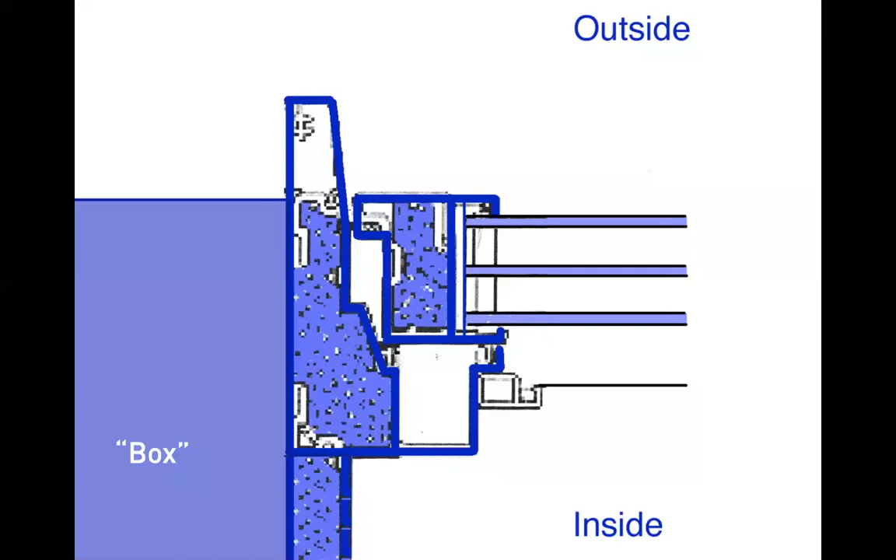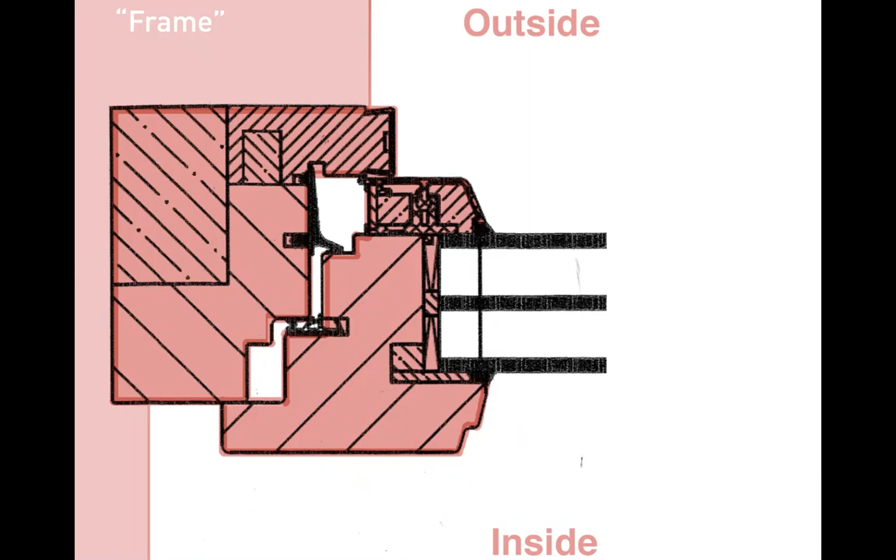We typically install what I call box windows. It's a window that you push in from the outside into an opening and finish it on the inside. Compare that with a European window - that's a frame window, meaning you have to finish the outside and the inside to it. So you set it somewhere in the middle of the wall in an appropriate location, and I'll get to that while I'm explaining it. But basically, you have these two kind of variations of windows in principle.

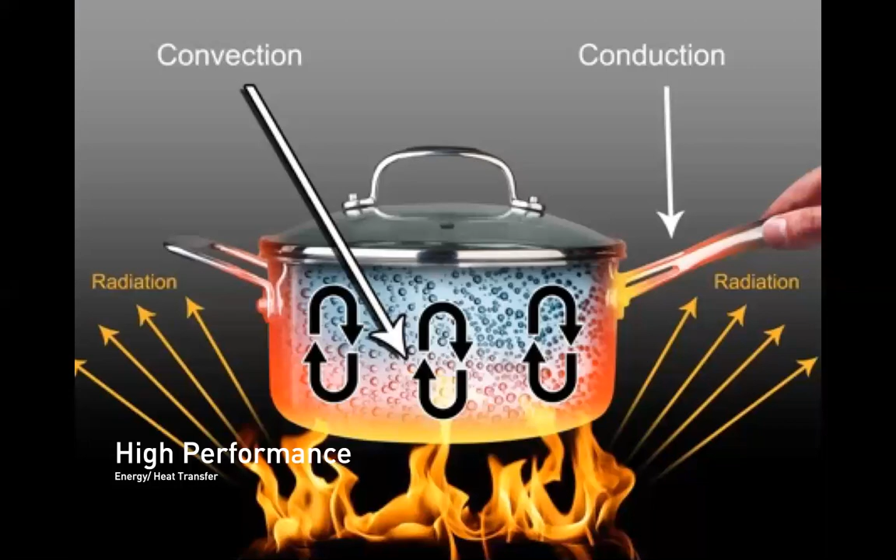The next thing is, we all know if we do high performance and talk about energy, it's all about heat transfer - convection, conduction, and radiation. If you build a whole passive house or you're looking at the window, fundamentally these principles apply. So a window or a window opening or door opening for that matter is basically a small passive house. So you have radiation, conduction, and convection - thermal radiation and solar radiation, and that's what we're trying to make use of.

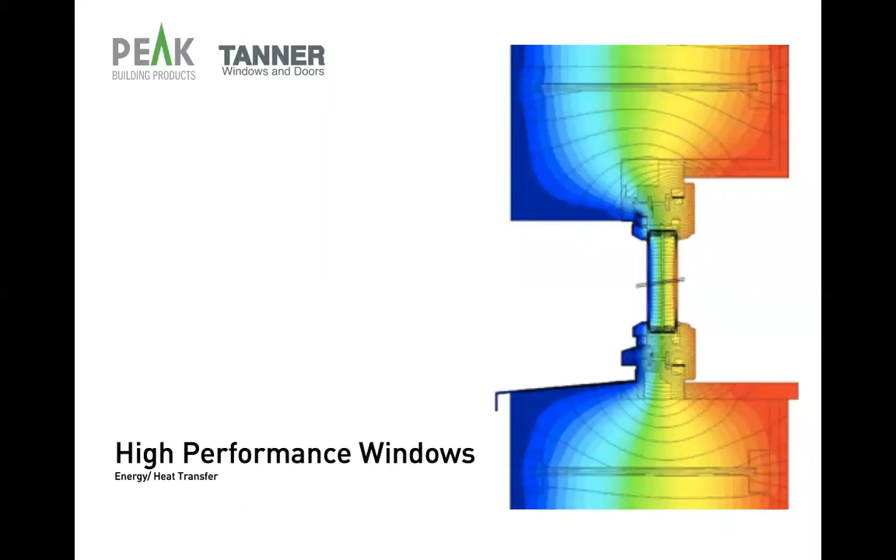If you kind of put this in a wall, this is how to make this transparent - we know all this graph. So this is now a true high performance window. We have the frame, and that's where the frame window really has its advantage - you can actually over insulate the frame. You make the frame part of your wall assembly, so there's an integration happening. You have the frame itself, and that is a component to be talked about, and then of course you have the glass.

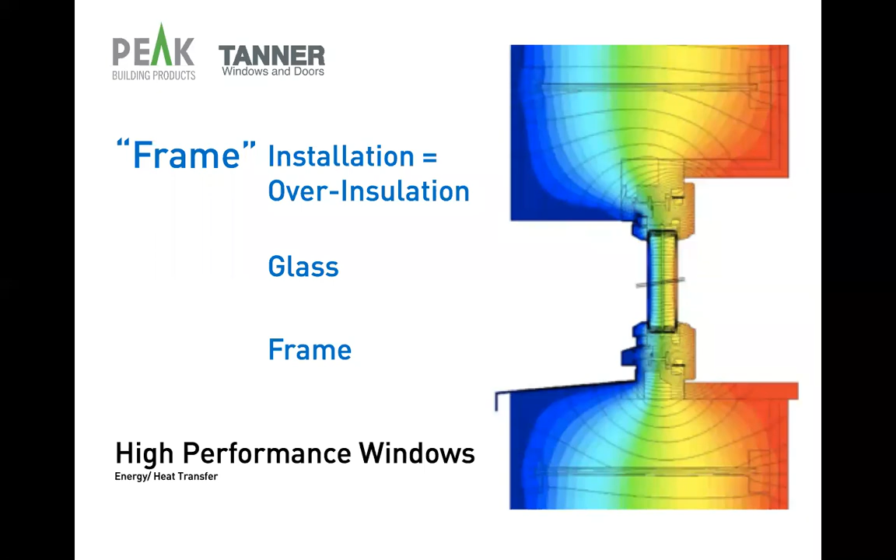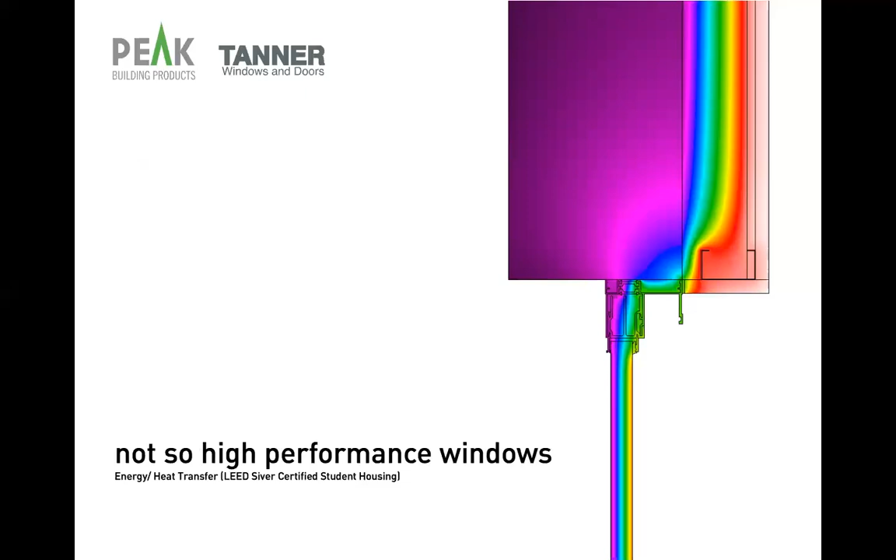Now you compare that to a not so high performance window, and this is actually in a college dormitory that received LEED Silver rating. You see that you have issues here of potential condensation, potential component failures. You even have the risk of mold and health-related issues.

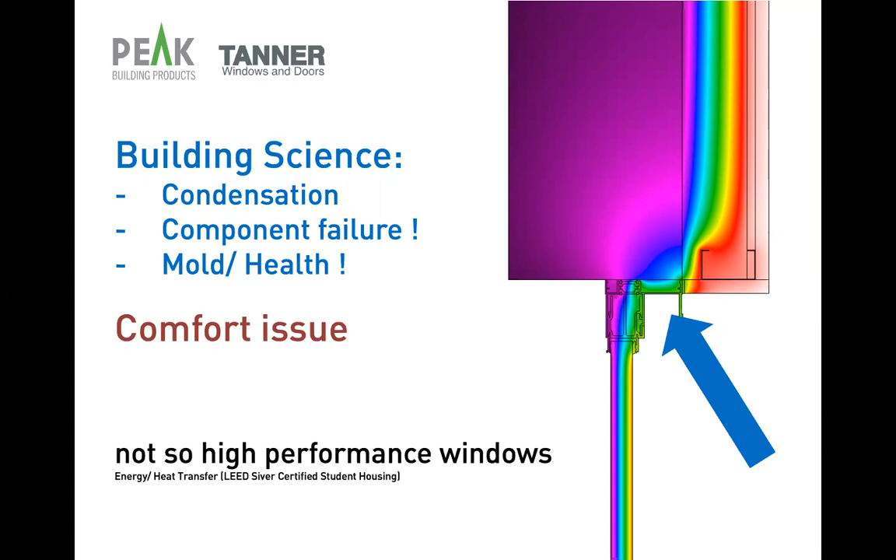So starting to insulate and make super and high-performance windows in buildings, the issue truly is it's not as trivial as many people make it sound, and the devil is in the detail. And probably the point to be made, next to the issues in blue, you also have potential comfort issues.

So getting back a little bit into the history of passive house and passive house windows - Feist, when he figured the passive house, or defined the passive house, started to define clear components to reach his target of 15 kilowatt hours per square meter heating energy. And of course, the most critical component, next to the ventilation system, is the window. So he defined in the late 90s the window components, and that 0.8 overall window target he set for certification of windows was really based on available glass technology at the time, and not available frame technology.

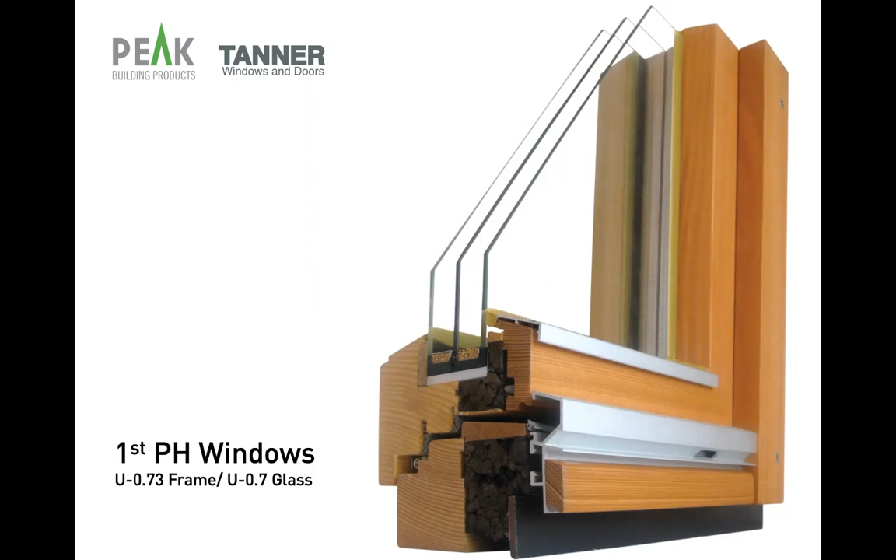If you compare that now with today's typical passive house window and go straight to that line below, you see our typical glass is 0.5. So there's truly less pressure on the frame than it was 20 years ago. This means the technology could be developed more around the glass, because the glass outperforms the frame in many or most cases.

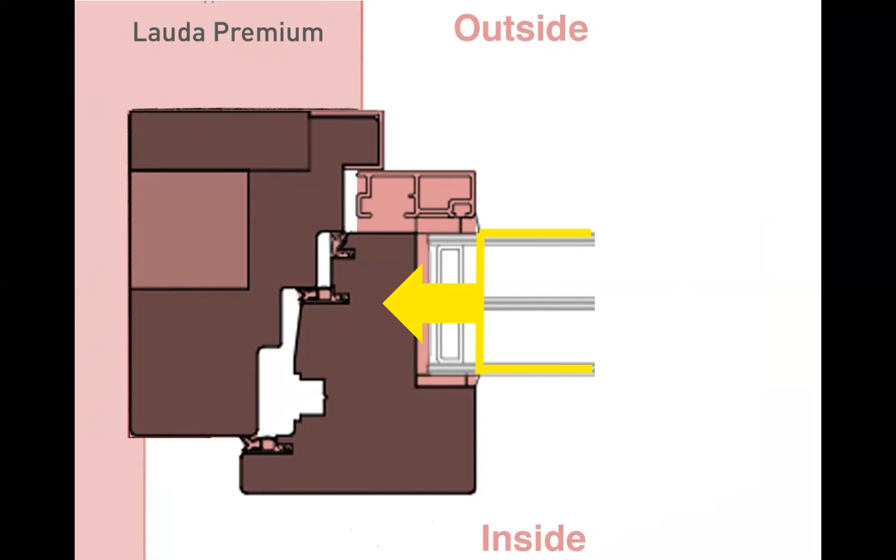That is a cost opportunity, but at the same time it's also a window development opportunity. You kind of see how we've taken it from our point of view at Tanner Windows. You could say, is there a way to value engineer this frame away so I basically only have glass exposed to the exterior? That's the third generation of passive house windows, our Vitra Premium, which you see installed in the wall.

Basically, a fixed window and an operable window. It has no frame exposed to the exterior. So from an overall performance aspect, this is probably a superior window.

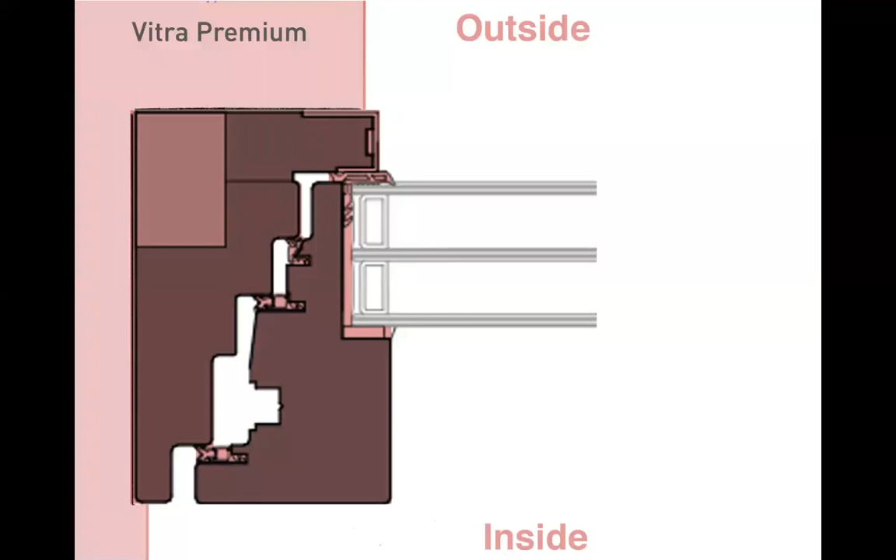Many people probably know it costs more than the typical frame window I showed you before. It just gives you a sense. And if you keep driving this to the extreme, this is our newest one, the frameless fixed window. You can basically just make glass openings with just the operable being framed. And that would look like this.

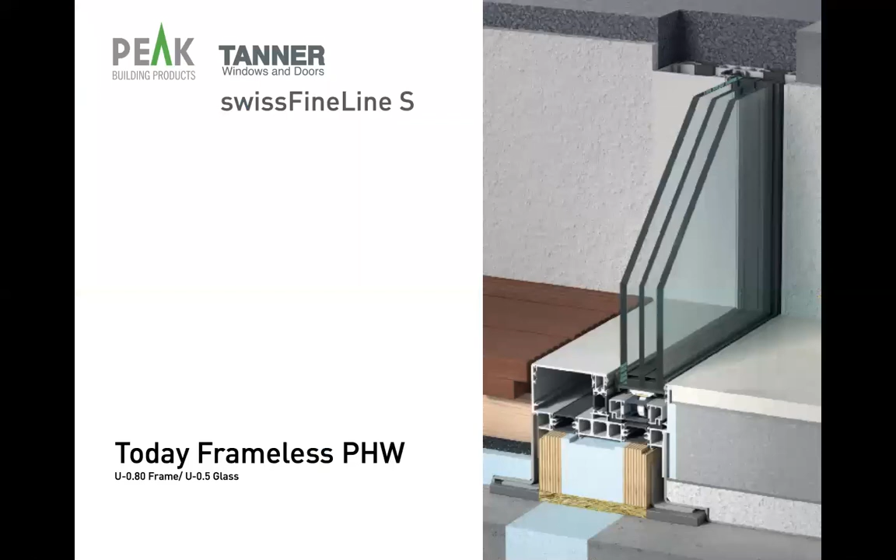Of course, in the metal frame world, you have these frameless windows, which we represent with Fine Line, which lets you do very, very large, almost just glass-looking buildings. What this really means is that the whole frame technology starts to move into the wall and becomes an integrated part of it. So the whole detailing is now more involved than just pushing a window in like the typical American boxed window.

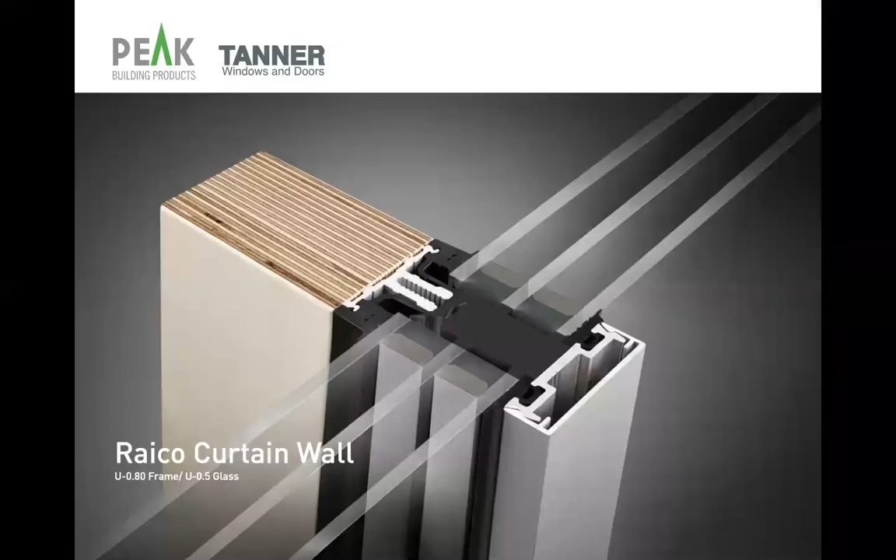You can do the same thing in curtain wall. Here we represent the Raico system. You see how this performs, as the heat transfer here shows. It also shows that you can do very cool stuff. We're one of the few who had the opportunity to build a glass box.

Now, the simpler it looks, the more complex it gets. I will stress this at the end again, but fundamentally, it really requires an integrated approach.

To make this happen, you can imagine that this is actually a bridge. The deflection of the structure of that glass box, with minimal shear in the exterior wall or none, glass corners with no support for the cantilevered roof, has deflection that is above and beyond any curtain wall or glazing component.

As such, finding a slip structure in this area so that the roof can move differently than the supporting glass structure is not a trivial undertaking, and takes time, and therefore also accrues cost. So this is not an inexpensive building, even though it looks very, very simple.

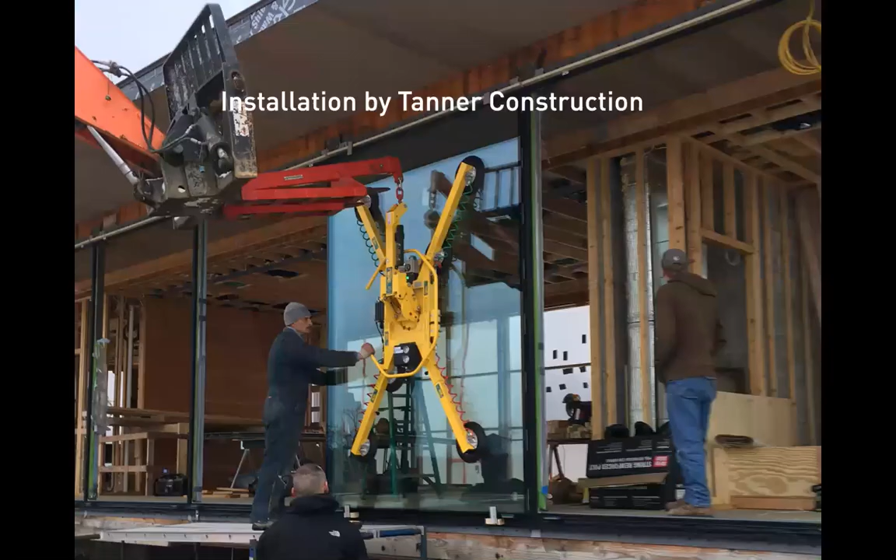We have the opportunity, as a company I work for, it's a family operation. My son Robert does sales. I support efforts on the technical side, and my second son, Seth, runs a construction company. So we actually do the full vertical integration and have the equipment to do all the large and complex installations.

To get back to the technology you're probably interested in, I tried to dig a little deeper here. Fundamentally, windows come in these typical frame components: man-made fiberglass PVC frames, the whole wood-clad system, and the metal technology used for frame. We only sell the wood and the metal, because the man-made typically has limitations in size before they need to put structural elements in, and then those structural elements become metal and struggle with performance.

So this is definitely a very viable option for a small to mid-size punch window. But as soon as you get to more complex configurations, the technology has its limitations. So we kind of stay on the wood and metal side. If you have any questions, I have less experience with the man-made material than I have with the others.

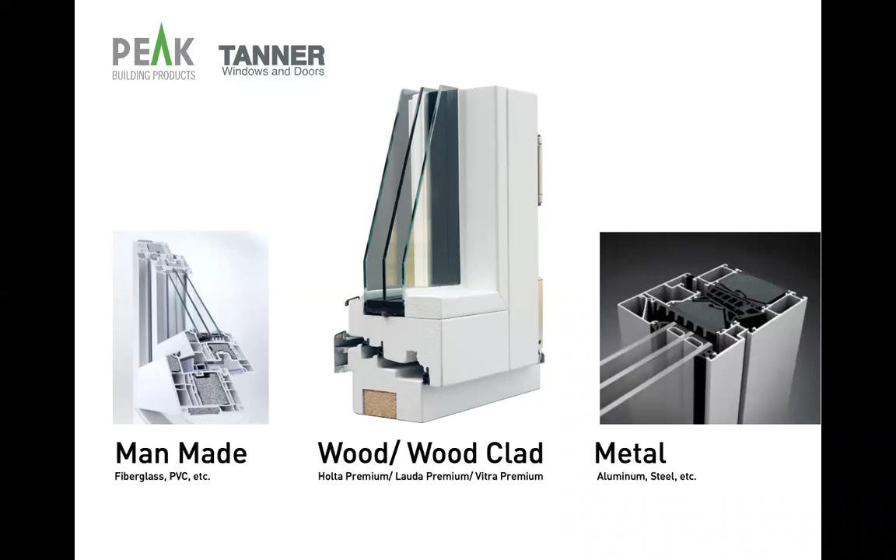A small point to be made: if you build a passive house versus a standard frame, you can use these days both, because with the high glass performance you get still quite good overall window performance.

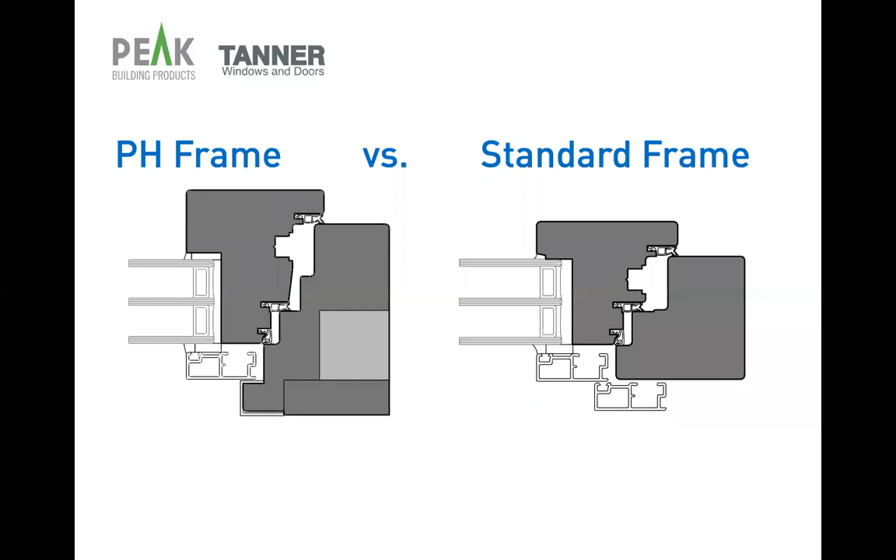The over insulation becomes interesting, and we know all about thermal bridging. If you look at the cladding, a true passive house frame has as minimal cladding in the over insulation part as absolutely necessary. We reduce that in the standard frame, but typical frames are all fully clad, and if they incorporate into the wall, you basically have a thermal bridge which defeats the purpose of the frame window's advantage in the first place. So that's something to consider when you look at different providers of high performance products.

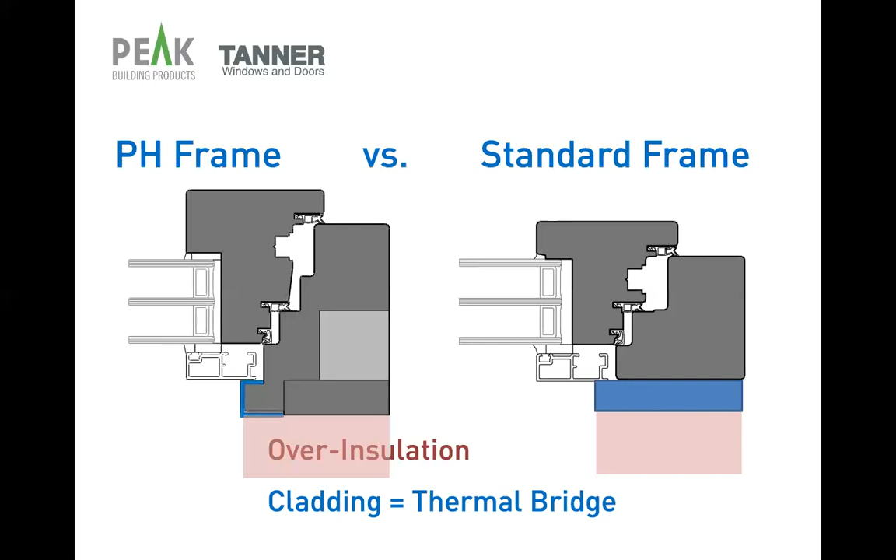If I dig deeper into it, a tilt and turn window here, a cross section of it, you start to see the hardware is usually in a particular location. Most Europeans use tilt and turn, so they're all toward the inside opening. Because you have over insulation, making them open to the exterior is counterproductive.

The second thing, if you have a window, you need superior seals. Typically there are 2 to 3 or even 4 opportunities to add seals to a window frame configuration, and that has to do with how the frame is actually configured in profile.

I think the most critical piece to understand with European windows, or these tilt and turn windows, is that they all have a water drainage layer. They are not built to be absolutely watertight. On high wind and rain loads, they receive water, and that water drains out toward the sill. I'll get to the installation and sill detail in a minute.

The critical piece is really the capacity of that drainage. If you have very strong winds and a lot of rain, the issue is overload, which can mean the wind pressure pushes water into the system. So we've added a second drainage layer, one of the few in the market, to accommodate that minimal event. It's definitely something to consider depending on your geographic location - in the desert Southwest less so than in the northeast of the States with a lot of rain.

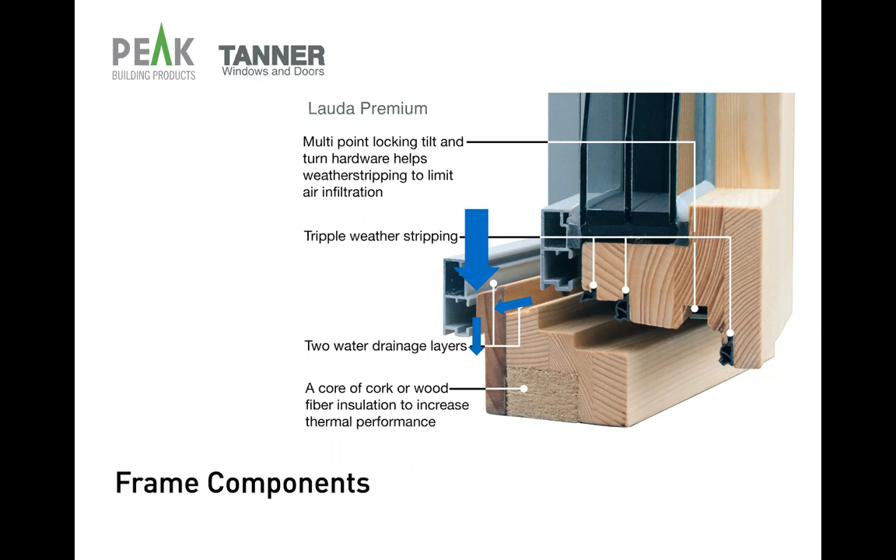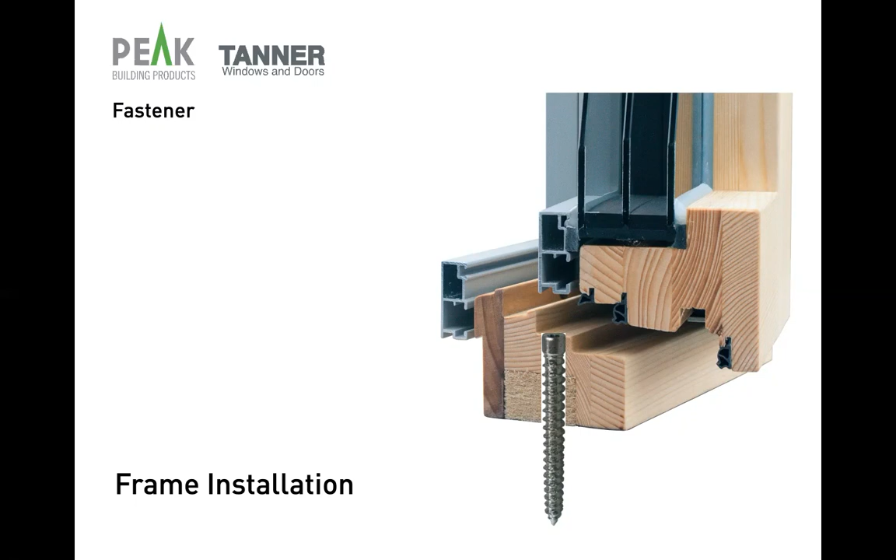Now to the installation. Typically, frame windows are installed with bolts - I mean, they are massive frames. The advantage is you have less of this S-curve kind of issue compared to the traditional thin structured box windows, which are like 4x4s you install into a structure. So you can use these bolts to truly level and plumb the window into the wall.

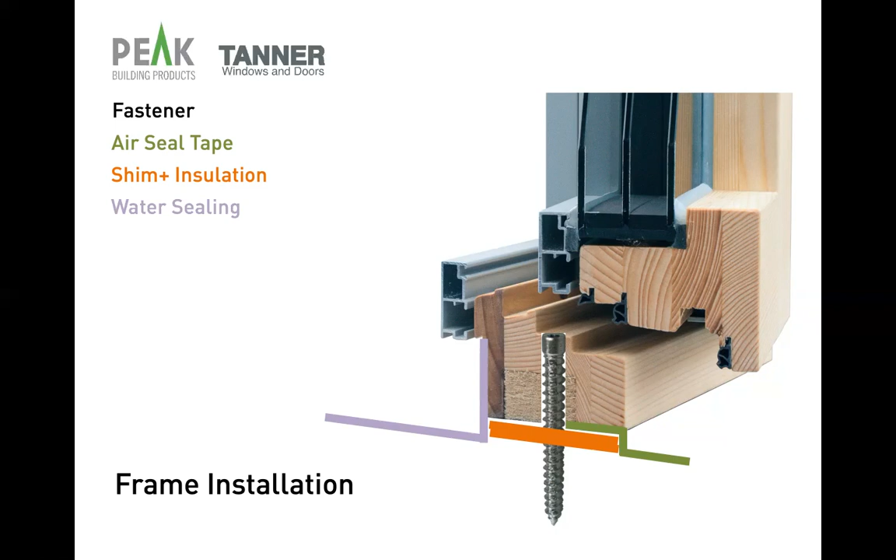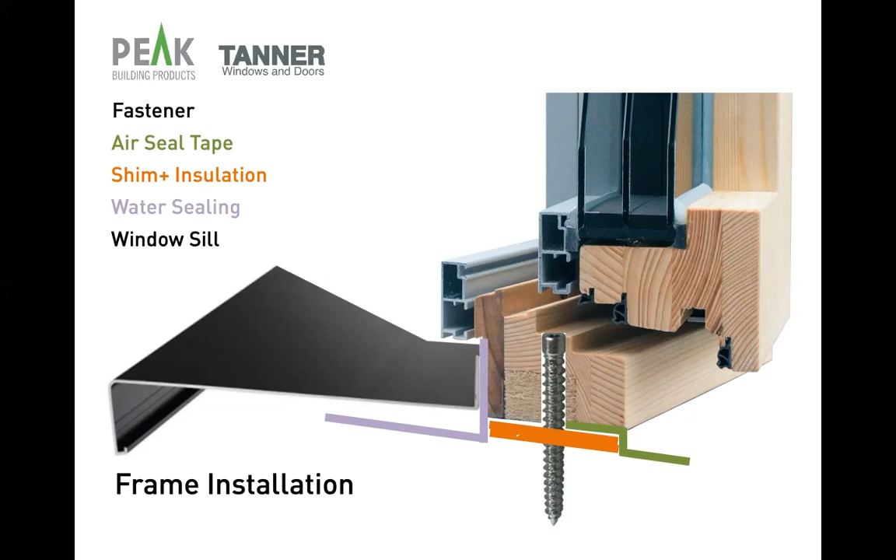It usually has a seal on the inside for air tightness - many of you know that. It gets foamed in and insulated in the gap. It usually attaches a water seal to the exterior of the frame, wherever that location is defined in your building, and then adds a sill to it. I think the most critical piece is understanding that water drainage area I pointed out before, which allows drainage off appropriately through a sill, can be any configuration. We typically provide, at least in our proposals, a placeholder for the typical European aluminum sill. But this is basically the basic installation component of a window.

Now let me transfer the point from frames, and we can talk more about frames - ask me questions. I know I didn't talk about doors and door opportunities and hardware opportunities, so one can go left or right here on the frame side. But now I'd like to briefly touch on the glass.

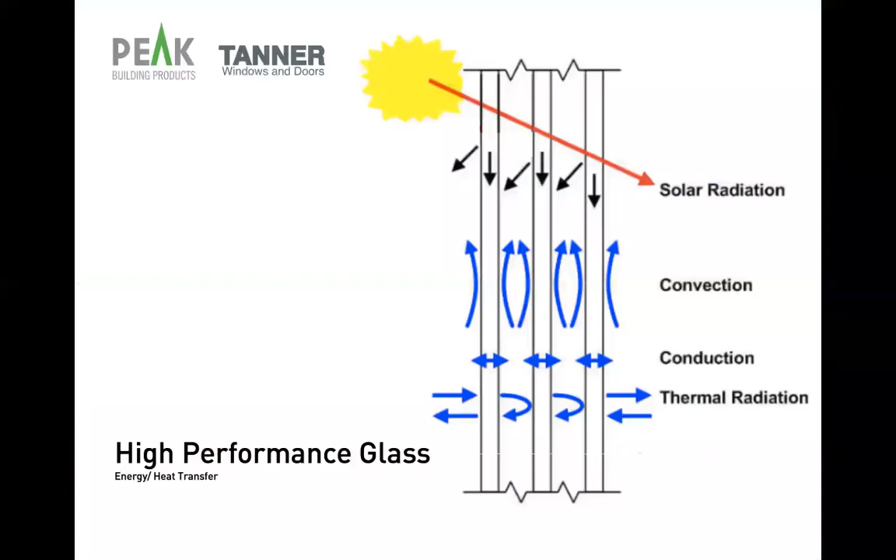So glass is really what makes it a passive house - that's the critical thing, as I pointed out. Glass technology is where things have happened. It still operates under the principle I pointed out: the glass is really the piece where the solar radiation is added to the three pieces below.

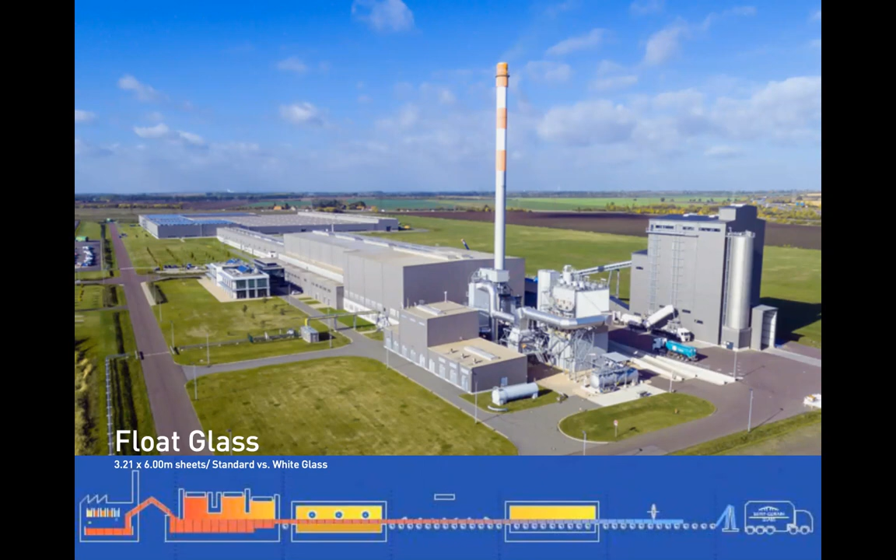The first major point I like to make is this is all major investment. Whatever we like to have done, you have to find a very particular newest machine to maybe get something you don't get anyplace else. Otherwise, the market really defines what you're going to get.

It's the first piece. And the second piece, to go slightly into left field, is it takes an awful lot of energy to make this glass, so you have a pretty large amount of embodied energy.

To give you a sense of this, as Andreas pointed out, I have many hats. One of the hats is I'm associated with a company called Intep, which stands for Integrated Planning. It was started after the first energy crisis in the late 70s, and we just celebrated our 40th anniversary.

Primarily focused on consulting, and the consulting expertise we have, which is quite unique in the world, is our forte of deep understanding of the material flow through the life cycle of buildings. So energy for us is energy flow, but we have material flow, we have labor impact, and so on.

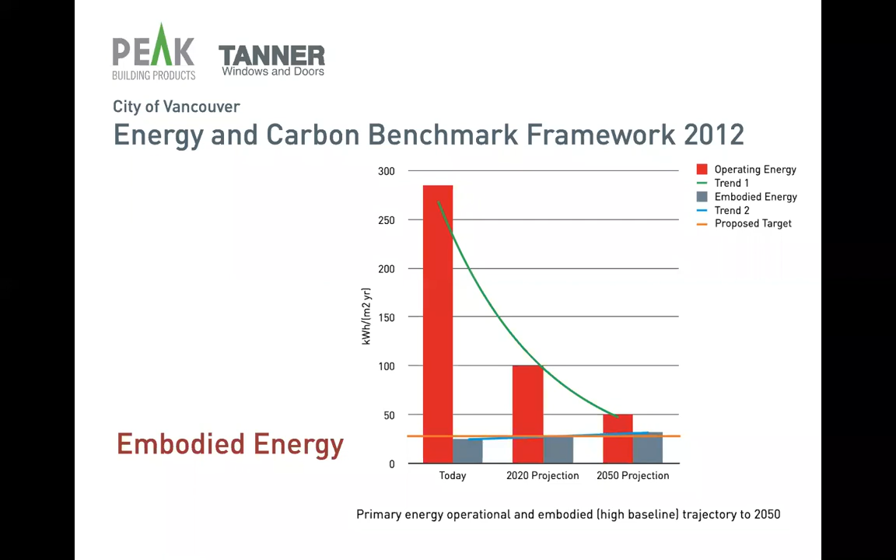Long story short, sorry for diverting off - we can have this conversation too, and I probably could have a workshop on that, but I thought it's important because we're talking about glass, and glass is a big embodied energy piece. Going now to the two critical values we look at in the glass.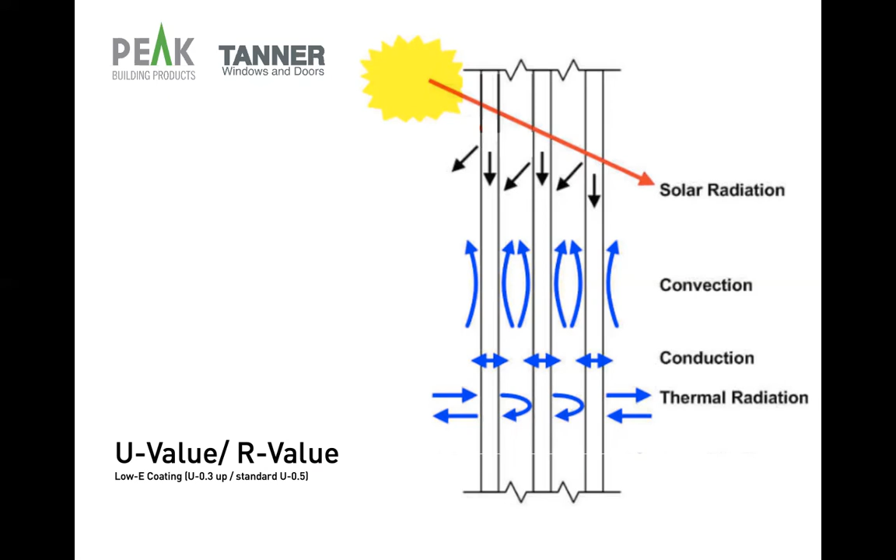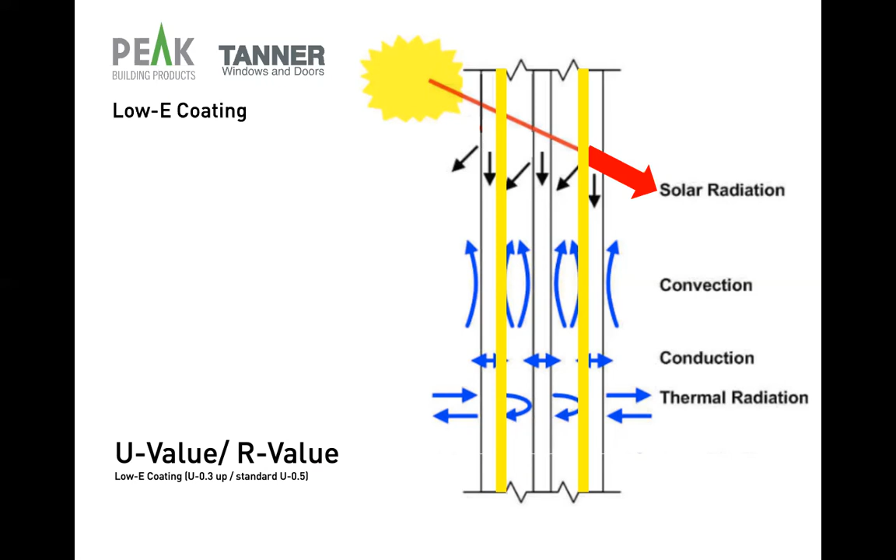The convection, conduction, and thermal radiation - these are basically coatings. You get them on the inner side of the inner pane and the inner side of the outer pane. They're commonly known as low-E coatings. They're typically silver-based, and that's what drives the price. The second piece, as probably all of you know, is the filling. The components for high performance are the noble gases: argon, krypton, and xenon.

And as the order goes, argon is the least expensive, krypton about 10 times, xenon about 100 to 500 times more expensive, or in that magnitude. So trying to go to the heavier gases is a good thing, it's just a cost driver. You also see the heavier the gas, the thinner the air gap can be. This is why you see North American suppliers quickly go to the thinner pane, double pane with the heavier gases, to try to compete in the U-value competition. But at the end of the day, the least expensive way to get really high performance glass is with argon.

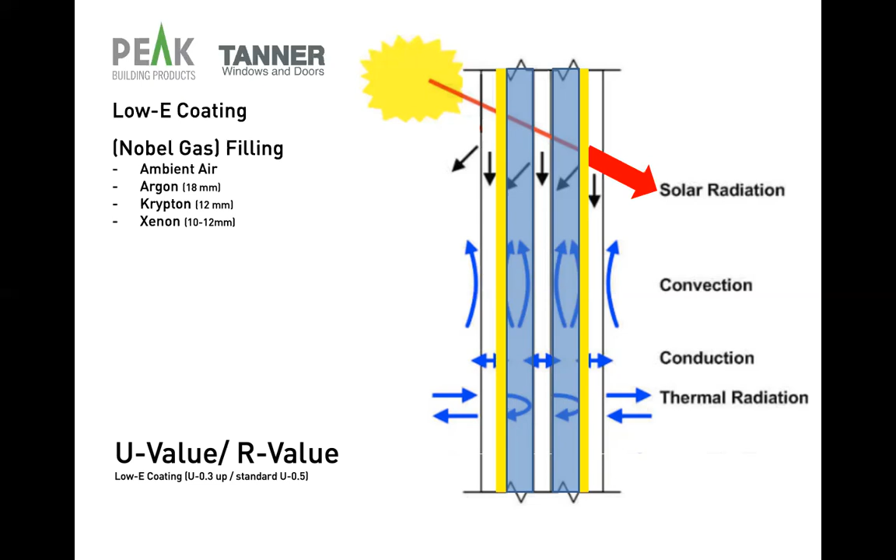And Feist already defined that also in his original targets and requirements. You typically can get from a supplier a glass spec sheet. You find typically the coatings listed someplace, listed here. Each manufacturer has their own name for it, so it's a name game.

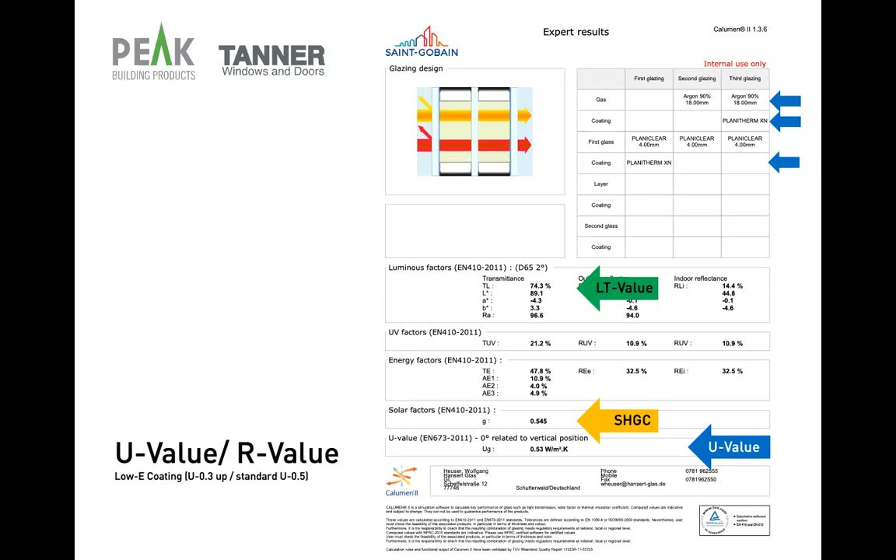And then you see up here the gas filling, argon, or all these gases are typically 90% or a mixture of. You can get argon krypton, you can krypton, and so on. There are tools out there, you can play with this. Some of these glass manufacturers can give you access to it, but it results in a U-value, and the solar heat gain and light transmitting values, which I'm going to get to next.

Before I get there, of course, many of you might have heard of vacuum glass. It's most common these days in China primarily. It has a certain cost, technology interest. It's been on the market for over 20 years. I've seen the first vacuum glass in the late 90s, early 2000s.

They're basically two panes of glass with these little dots, there are spacers in between. You see the space in between is part of a millimeter. And then the vacuum is really the place where the insulation value comes from. The issue with these is the size is, by most manufacturers, limited to how they can manufacture - a meter 50, so 5 feet by 8 feet is about where they cap out. I don't know of many who'd make them bigger. And the biggest issue is, of course, the edge, because that's where you seal the vacuum in. So there are some issues with this particular technology, and we can talk about that.

Which leads me to the edge condition. So the spacer is, I think, one of the most critical, undervalued components. They're very, very hard to get here in the US. I don't know of any insulated glass unit manufacturer that stocks super insulating spacers like a Swisspacer Ultimate. They're standard in any European manufacturing plant. So for us, we struggle with that tremendously. We produce everything in the US and in Europe, due to some of these component limitations, and that's really driven not by technological limitation - it's basically a market demand limitation.

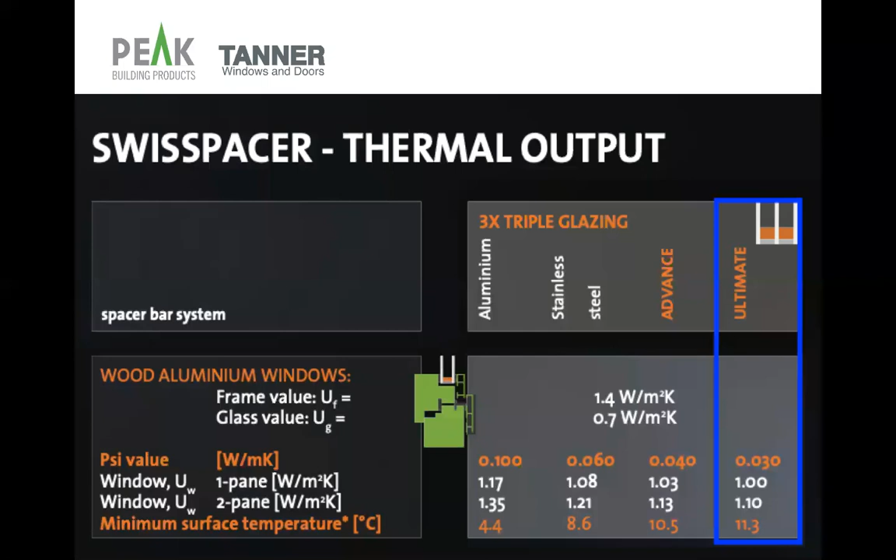There are many things one can go down. Glass can do many things. On the coating side, I can coat for UV, I can coat anti-glare, so you can make glass that you don't see if it's very clean, and people can run into it. That's probably the downside - that's what birds also do, so anti-bird strike is a coating. You can go to smart glass, so you can put current to it that changes the tint or the solar heat gain coefficient on it, and so on. So fundamentally, there are other coatings. You can treat glass - heat treatment is probably the most well known, for security reasons. And on the security side, you get to lamination for the same reason, security. But you can do it for sound, bullet, hurricane - you go down the list. There is a whole list here, and that can be endless in itself.

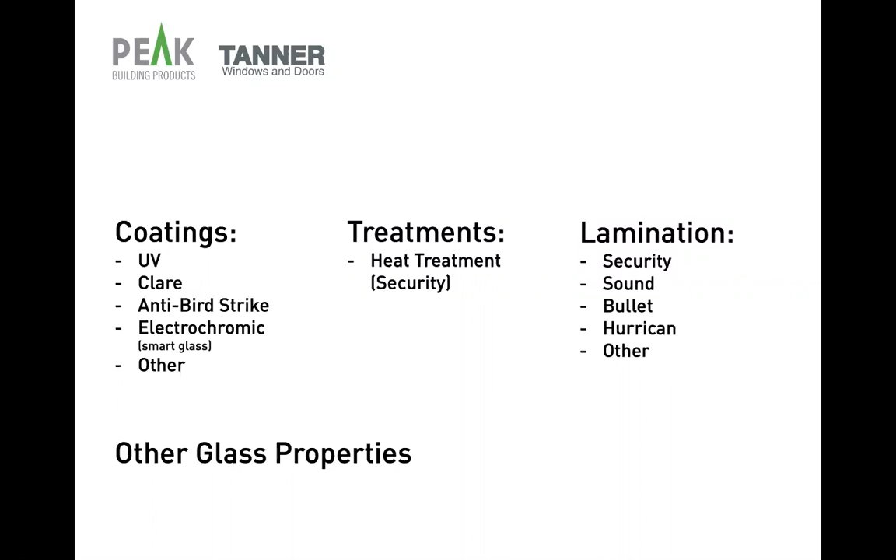So I move now to the second piece here, and I think that's what makes the passive house a passive house - really making use of the free solar radiation. And so if you are in a climate that is cooling load driven, the typical and traditional response to that is that you coat for it, and you do that on the inner side of the outer pane. And you can reduce that into 30%, 25, 20% solar heat gain coefficient. The lower that goes, the more expensive these coatings typically are.

A personal note to this here, and I added the light transmission value to it. Of course, the lower the solar heat gain, the more it becomes like sunglasses. The more tint you have in the glass, like sunglasses, the less light comes in, and that's the light transmission value. So the light transmission value also gives you a sense of clarity of glass. And if you look to the capacity of coating equipment or their age, this is really the interesting place to look at it - see how low the solar heat gain coefficient is in respect to how high the light transmission value is. That means the clearer one can make sunglasses, the better and newer the equipment is, because that's really where the newest coating technologies have made advances in the last decade.

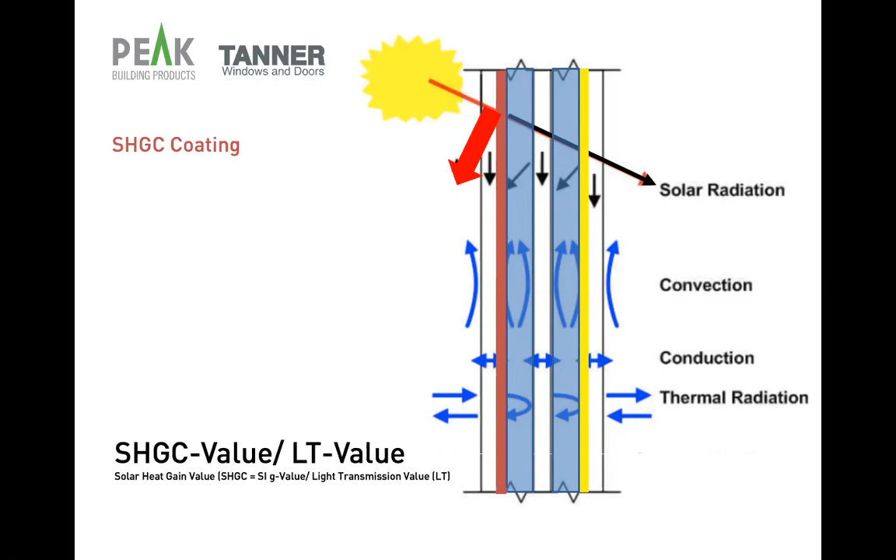So as I pointed out, these are these pieces, you find it again here under the coating side. This is a Saint-Gobain Cool-Lite Xtreme, the most typical one we use. It has a light transmittance of almost 64%, typical of 70, but you have a solar heat gain factor down at 0.31. That's probably as good a spread as I know and have seen.

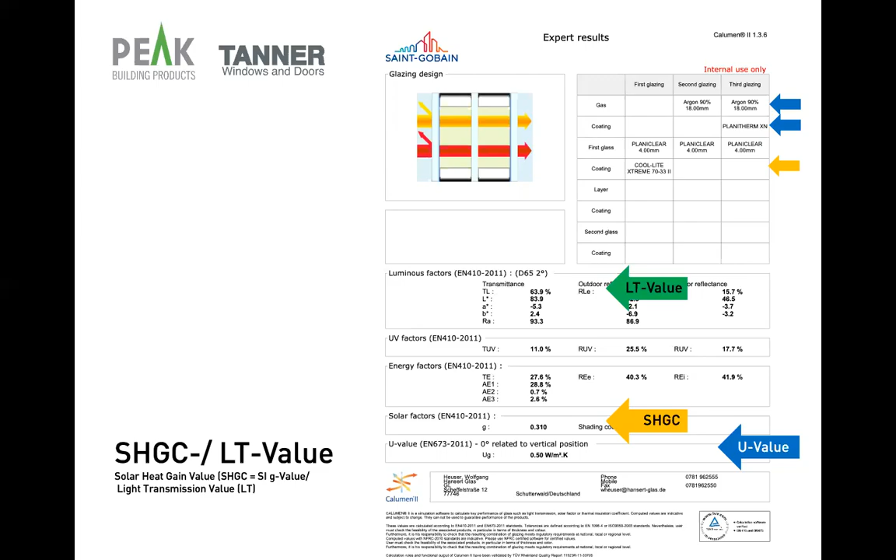These coatings might be different in the European environment than in the North American environment. I know I would struggle to get some of this out of a North American factory setting. And that brings me to the second part of my presentation, why I combined these two components: there is a way to have the cake and eat it too.

It's called exterior shading. We typically use Venetian blinds, and I'll explain why. As I said before, we can evaluate and calculate the solar heat gain coefficient of any fixed shading, all the way to trees. We don't use trees because of control over it. We just use them in calculation to see what we might lose in solar heat gain on the heating side. But other than that, trees are great and they do work. I'm not arguing that, it's just a little too uncontrollable for my personal taste, but that's a personal preference.

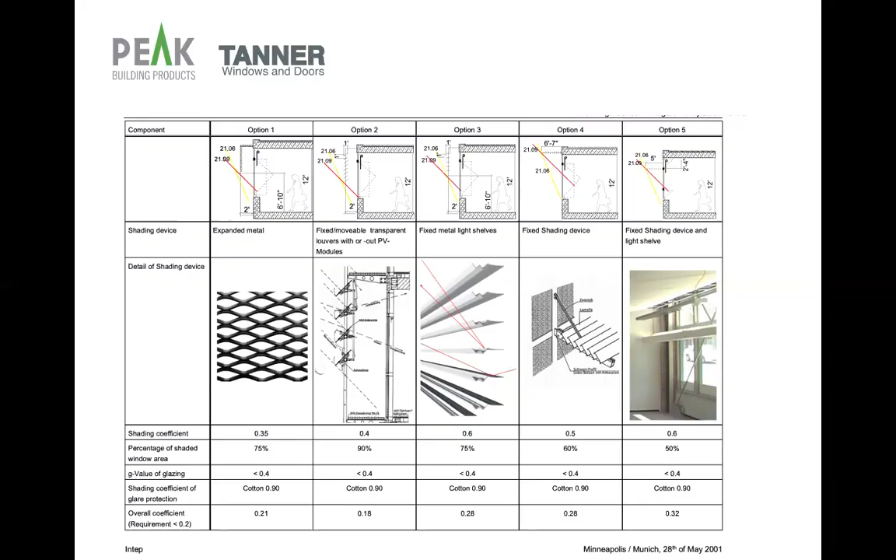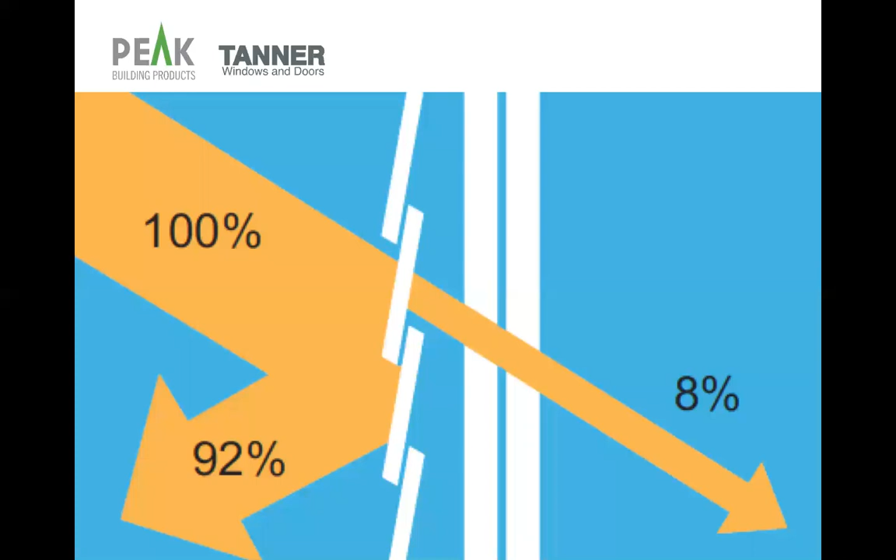So exterior Venetian blinds is the starting point for exterior shading for us, and here's why. From the 100% solar heat gain, I can basically turn this off. Looking at a building going through here, the point I want to make is the control you have. I can shut them off at night to have it dark, or shut them off during the day to block the solar heat gain if I don't need it. I can still control light transmission for working and sight through the window.

Yes, I still have some obstruction due to the blinds, but at the same time I have the capacity to even use the blinds for light shelving, to get light in and still control solar heat gain, as you see in the graph down below.

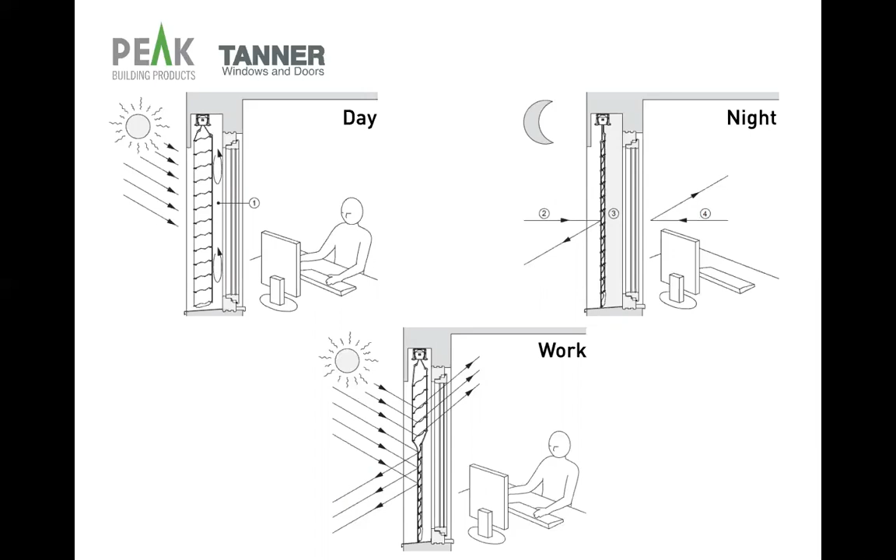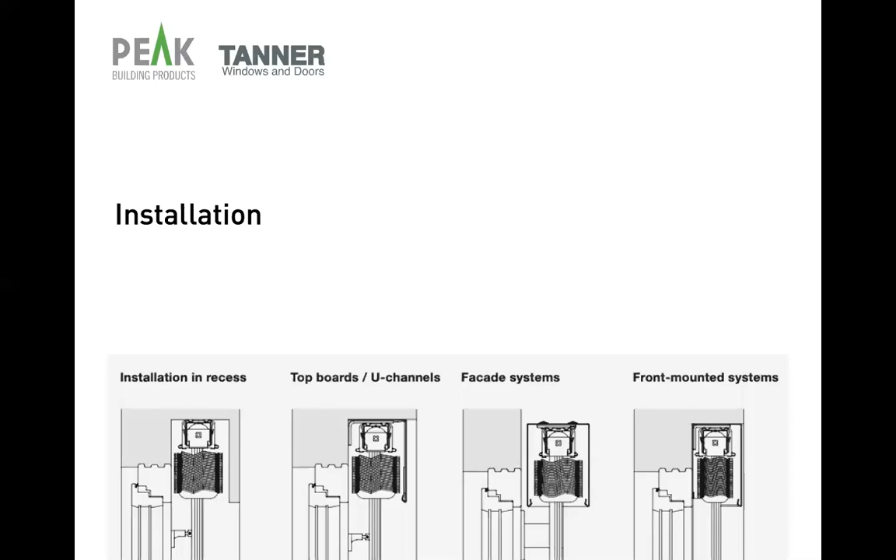If I go to installation, basically they're installed to the exterior. In passive houses, because we have a very deep cavity, it's easy to incorporate them in a pocket situation so you don't see them, unlike in a retrofit. That's the graph all the way to the left. The graph second to the right shows the most typical retrofit solution. You can also add them at any time to the building after the fact. The critical issue is really just the motorization, the power to it.

Here's a typical detail we do, and you see how that fits into a TGI, 10-inch. So there's plenty of space for them. It's typically about 5 to 6 inches of width you need, and we still have the ability to over-insulate the frame.

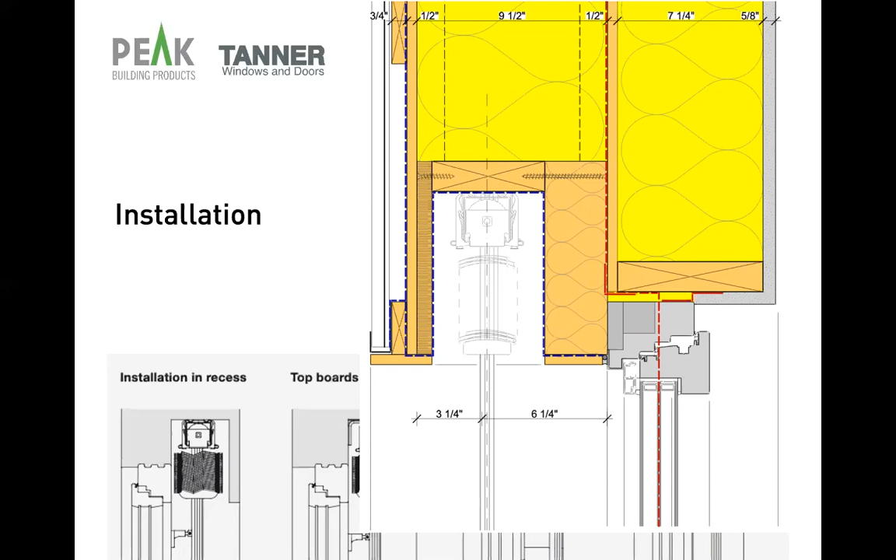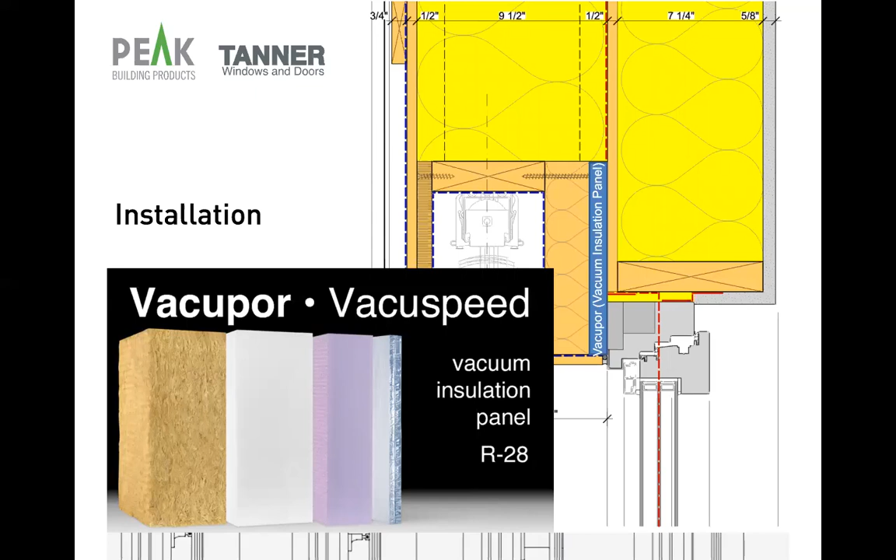Should you not have that space, we also sell vacuum insulation panel, that's R28 — you can look up that information on our website. It's just if you don't have the space for insulation but need super insulation, that's a great material to use. It costs about the same factor; it offers more insulation per inch for the cost compared to traditional insulation. So it's not inexpensive, probably not used where traditional insulation can do the job. But if space is of value to you, either by real estate value or aesthetic, technical, or other issues, this is a tool or material that was not available before. It's been available in Europe for 20 years, but I believe we're the only supplier at the moment for the North American market of this product.

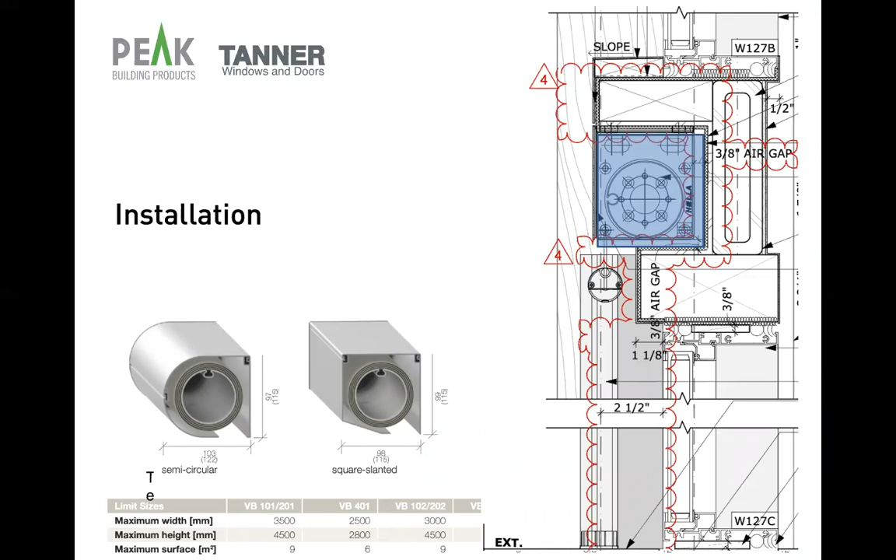And then the last piece, the shading pieces, always comes up and most people don't understand it. It's pretty simple, I like to keep it on that level. Here, each one is a rabbit hole.

We can go deep, but all our shades are motorized. There's no crank, because the crank makes a hole in the building. We can't have holes in the building.

In passive houses, you guys know all that. So the motor is pretty simple, it has no intelligence. It basically has two power feeds. The power comes in one way, it turns right. The power turns the other way, and it goes left, meaning it either goes up or down.

So any home automation system should be able to handle it. Lutron, for example, struggles with climate control, but other than that Homeworks does that just fine. They have all the components for it and you can incorporate it. So, a motor controller, and the next thing is shades.

The only risk shades have, and that's the major risk, it's not snow, it's not ice, it's not rain - those are all good ideas - no, the only major issue these have is wind.

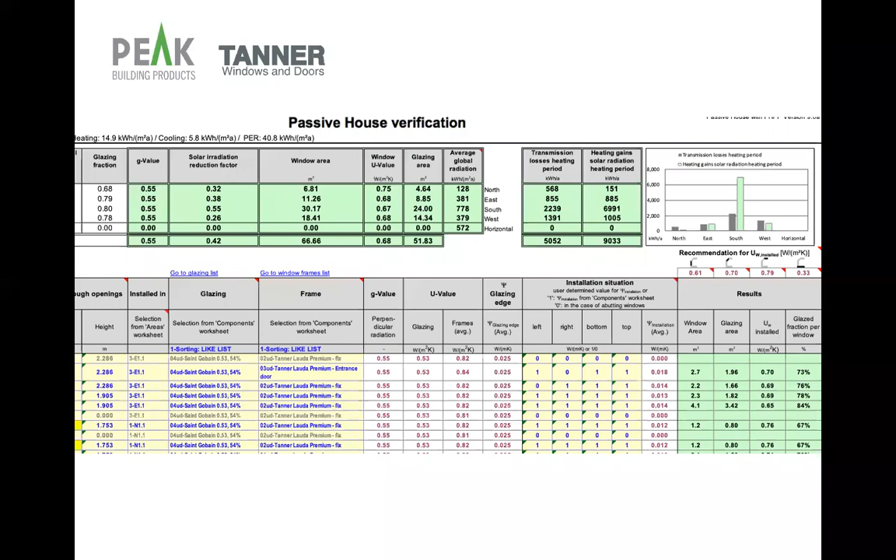That gets me almost to the end of it. I show you here your passive house verification sheet, the window page, to just kind of point out the key summary of it - why a passive house or a high performance building is what it is. And that is that transmission losses on the windows are substantially less than the heat gains.

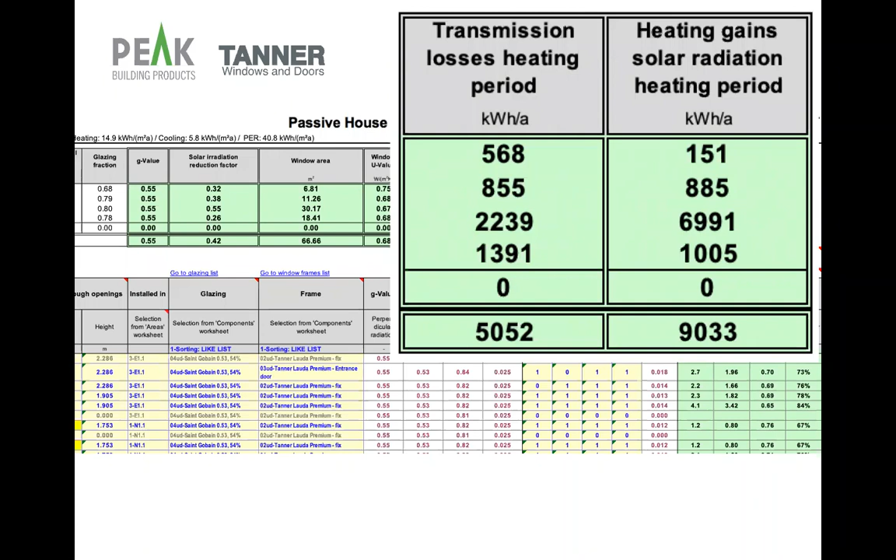And this is basically the free heat - there's nothing cheaper than free. So here it is, and my only point is that high performance buildings require an integrated approach.

So you can buy good individual components, but if they're not incorporated into the building in such a way that it's a win-win for the whole system, it's a system-optimized solution you want, not a component-added solution.

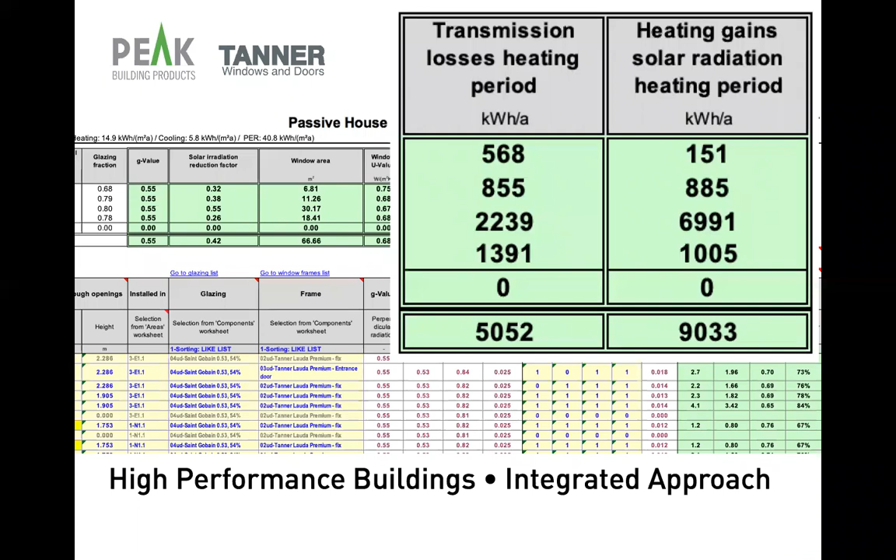You have less chance of the performance you're looking for the other way, and with high likelihood it also costs more. So the question of cost of the component is not necessarily always just the cost of the individual component, but how it's really integrated into your building.

And with that, that's kind of my thing here. Any questions, please feel free to ask. And if you have any questions or want to contact me afterwards, here is my contact information.